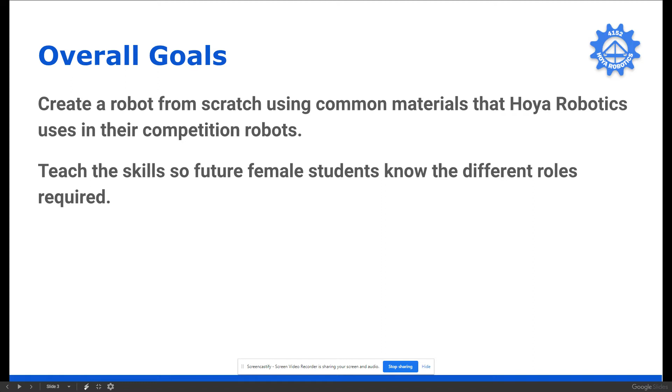The overall goal for these tutorials is to design a MiniBot, and we've got a series of girls from grades 5 to 10 that are involved in this, and we're doing it remotely because of COVID-19. Our goal today is just to learn about the motors and gears and select them for our robot.

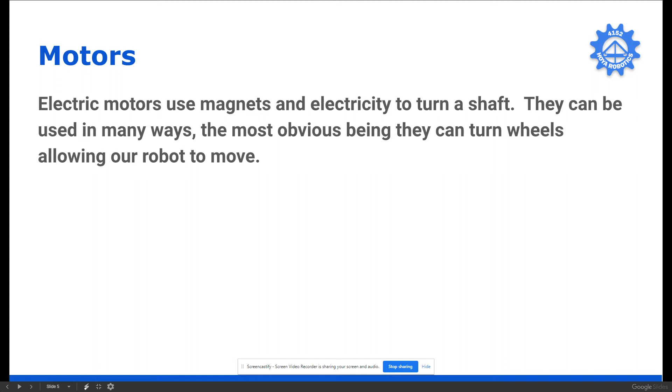So just a little bit of background. Motors that we use on a robot are electric, and if you took apart an electric motor, you would see that there's magnets, and basically an electric current runs through the wires, which magnetizes them. So if you have a positive magnet and you're pushing it against another positive magnet, you're going to get repulsion, where the magnets move apart. That's the basic idea with how the motor works.

There's a couple key terms that are really important. Free speed - we measure this in revolutions per minute. If the motor was just running with whatever amount of voltage you're applying, what speed is that shaft going to be turning at? If you were to count how many turns it made over the course of 1 minute, that's how fast it is. You can use that information, if you know the diameter of a wheel, to determine how fast the wheel would turn and how much distance the motor would cover.

The stall torque - this is how much force. If I've got a shaft turning and I apply a force against it, how much before it stops? Think of biking up a hill - you might reach a point where you simply cannot pedal anymore because the amount of gravitational force is preventing you from getting up that hill. Typically with motors, we measure it in ounce-inches or newton-meters. So if your shaft was turning a pulley that was lifting a weight, you could determine exactly how much weight you could use before the motor would stop.

If a motor stalls, the electrical current is going to go up. This is how much electrical current is going to be going through when that motor stalls, and this is really important, because increased current will increase the level of heat. You can get a point where a motor is trying to push and it simply can't - the current goes up, the wires get really hot, and when things get hot, things start melting, and then you get fire. So if you know the stall current, you know what fuse to put on so that it will pop the breaker or blow the fuse before it damages the motor. That's typically measured in amps.

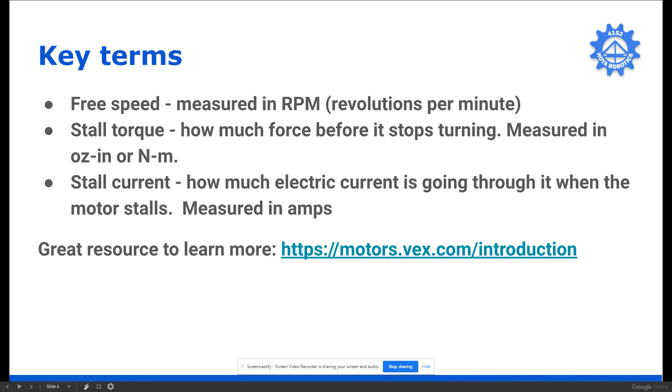The website listed there is a really good resource to learn more in detail about this.

When we go into competition, we are following the rules for the FIRST Robotics Competition. firstinspires.org is the website, and it's really important to spend some time exploring it so that you know how to pull up the manual. This is from the manual, and you can see that it lists the types of motors that we're allowed to use on our robot. This is really important - you basically don't use a motor unless it's listed in the rules.

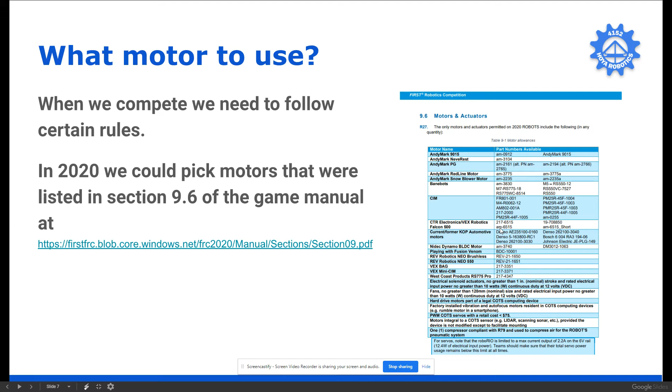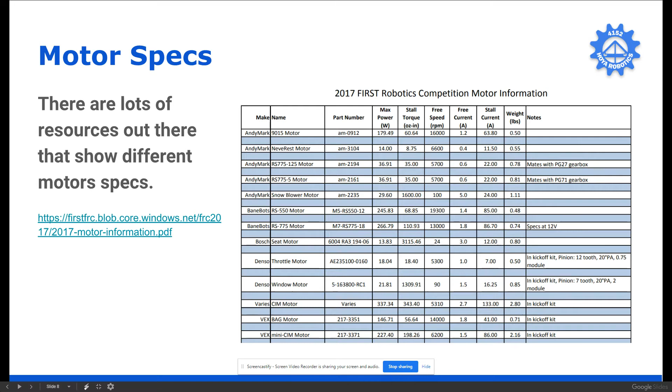In terms of motor specs, on the firstinspires.org website, if you go to the FIRST Robotics section in the programs, you'll see there's a lot of different resources. There's a chart like this which is really handy because it gives you information about the different motors and how much power they can have. Now this is from 2017, so it's missing some of the newer motors. When you're looking at newer motors, typically go to the manufacturer's or the seller's website, because they'll have the detail. Vex Robotics is a good example.

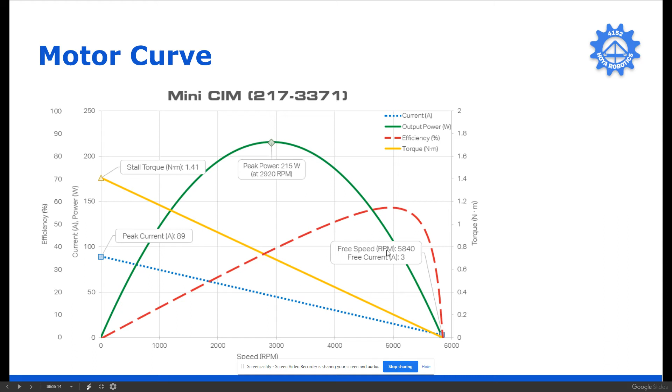Now, the problem is that usually you don't want to typically run your motors without being able to change their speed or their torque. And this is where gears come in.

So you have a 10-tooth gear right here, attached to the motor, and you've got this bigger tooth gear here with 50 teeth. As this small one turns, each tooth is going to engage and turn another one, so this will go all the way around, but what will happen is that will only move this 10 teeth. So this has to go 5 times around before this will go once. So if I've attached this small one to a motor, the motor can go really fast, and the output from this gear will be much slower - it'll be 5 times as slow.

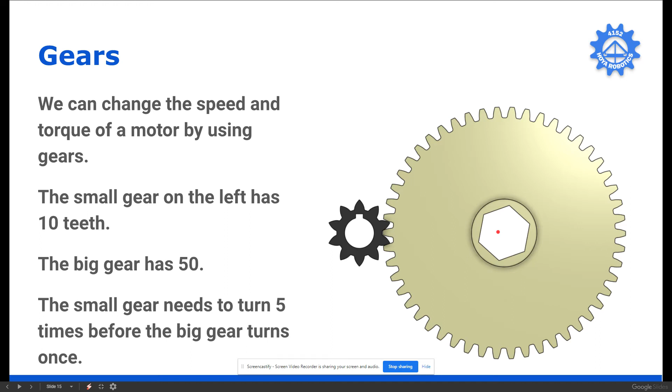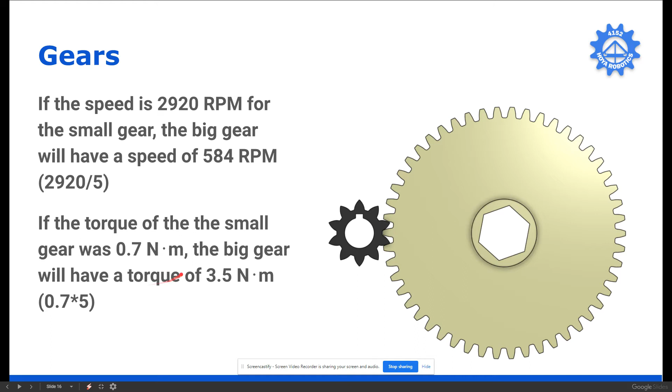So this is a really useful concept because I can change my speed - now my output is maybe 584 revolutions per minute, so it's slower, but it also increases my amount of torque. Now I'm going to get 3.5 newton-meters torque out of this. With my calculations, I'm basically dividing by the gear ratio or multiplying for the torque - it's not quite that simple, but for our explanation, it is.

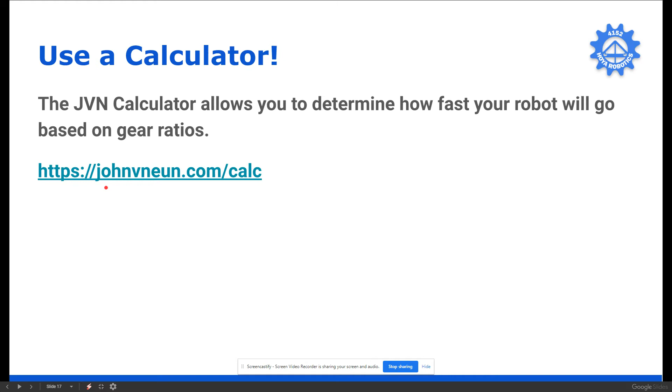Now, the JVN calculator - this is a really useful tool that somebody created, and there's a link you can download it. It's a spreadsheet, and you can upload the spreadsheet to Google Sheets so that you can actually make changes in it. On the spreadsheet there's a whole bunch of different tabs, and this is the tab for the one-speed drivetrain.

Basically what you can do here is you can put in what motor you want - this little drop down, I can pick the different motors that are available. With the red, I typically will look at these - for example, number of gearboxes and drivetrains, so we're going to have 1 on each side, so 2 in total, and we're going to put 1 motor in each gearbox. The total weight of our robot, I'm estimating, is going to be 25 pounds. Our MiniBot is much smaller - typically an FRC robot can be about 150 pounds, they're fairly big.

And then I can also decide what size wheels - I'm just going to aim for 4-inch wheels. Then in here I can start playing around with the gears, so I go to the Vex Robotics website and I look at the different gears and stuff, and I am using a 14-tooth gear on my motor. How I picked these is basically I looked through what gears we currently had, and these are ones that I have available, so I'm just going to plug them in. So if I'm going from 14 teeth and driving 50 teeth, then 16 teeth to 48, and then a series of sprockets 12 to 15, this will give me a gear ratio of 13.39 to 1.

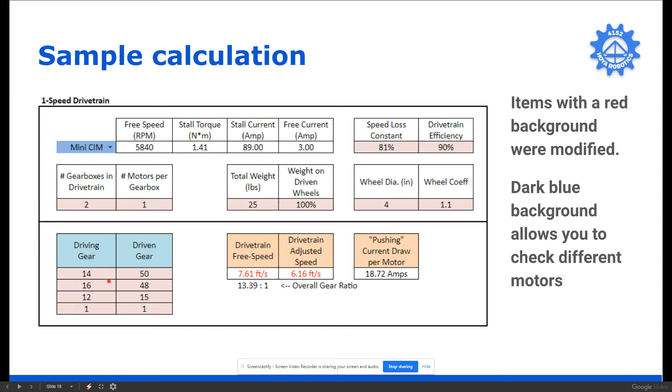With our drivetrain motors, usually we're on a 40 amp circuit, so we want to keep this number under 40, and under 20 is fabulous. It's nice and low. I've got a little bit of wiggle room, but you want to play with the numbers to find the ratios that are going to work, and then you can figure out what types of gears you need to buy to make your robot work.

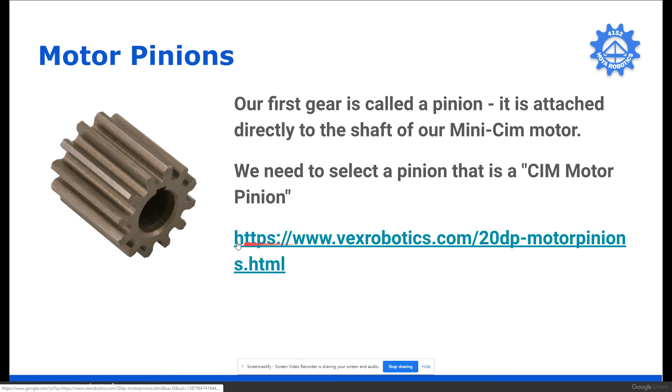So, motor pinions. The first gear is a motor pinion, and this is an example of one of them, and it fits directly on the shaft of a Mini-CIM motor. A Mini-CIM motor has a round shaft that's got a little slot, and you can see the slot here. Basically, this slot allows you to put a key stock on it, and the key stock is just a rectangular piece of metal, and that will go in here and slide into the shaft of the motor, so that it kind of locks it in place, so that as the motor shaft turns, this will turn as well. Different types of motors are going to use different types of pinions, so it's important to make sure you're getting the right pinion for the right type of motor.

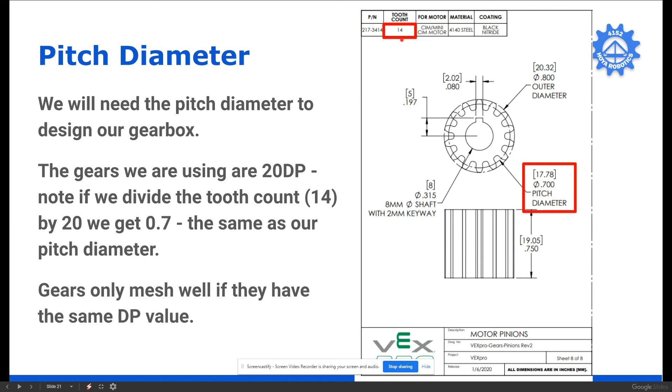So gear 1 is the 14-tooth gear, and on the Vex Robotics website, that's the particular one we're going to be using. Down at the bottom of the Mini-CIM page, you can see there's a whole bunch of different options, and the drawings are one of them. This is the drawing for the 14-tooth gear. You can see the tooth count, and you can see the pitch diameter.

In order to plan our gearbox, we need to know the pitch diameter, and there's a nice little trick here. We have a 14-tooth gear, and our gears are 20 DP gears, that's the type of gear they are. DP stands for diametrical pitch, but basically if we take 14 and divide it by 20, we get 0.7, and that is the pitch diameter, the diameter of this line. When we're designing our gearbox, if this line is touching another circle with the same thing, then we know the teeth are going to engage. So we've got to make sure our gears have the same diametrical pitch, and then we can line up these circles so that we know the teeth are going to line up perfectly.

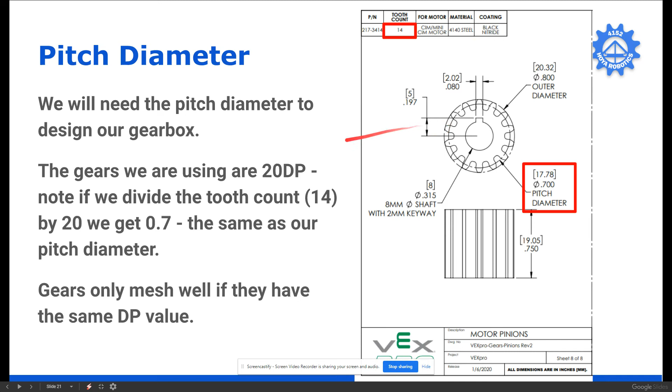Our 14-tooth gear is, if we were to get this overall gear ratio, then we would need a second gear of 187, which is going to be 9 inches in diameter - not going to work very well.

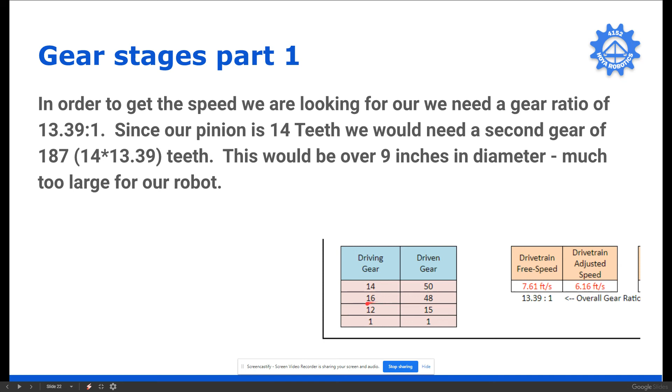So this is how we do stages. Our 14-tooth gear is going to drive a 50-tooth gear. Then we're going to put a gear on top of the 50-tooth gear that's going to drive a 48-tooth gear. So we're going to have multiple stages, which will allow us to get the gear ratio we want without having a ridiculously large gear that simply won't fit.

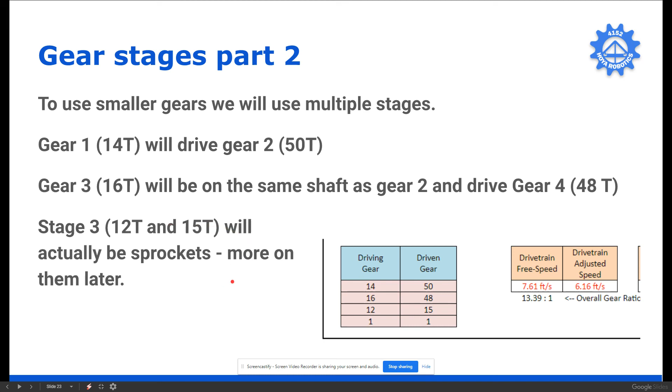Gear 1 drives gear 2, gear 3 is on the same shaft as gear 2, and it drives gear 4. Then we're going to use sprockets, and we'll cover those in a later tutorial. Gears 2 and 3 are going to be on a 3/8 inch hex shaft. The hex shaft is really nice because you can just slide the gear onto it, and when the hex shaft turns, because it's a hexagon shape, the gear will automatically turn. So it's very easy to mount and assemble them.

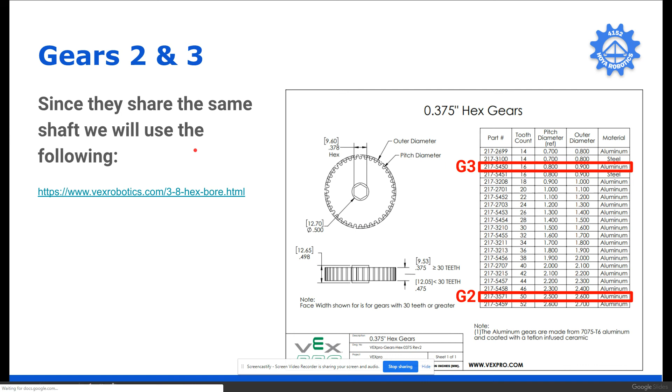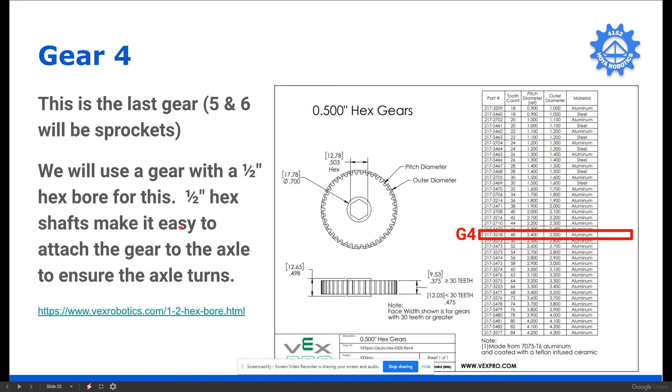Gear 4 is a 48 tooth, and again at 20 dp, it's going to be this. Now this is going to be our output, and we're going to use a 1/2 inch hex bore for this. A 1/2 inch hex shaft is how our wheels are designed, so it's going to be easier to use the same thing with the gear. So that's our goal.

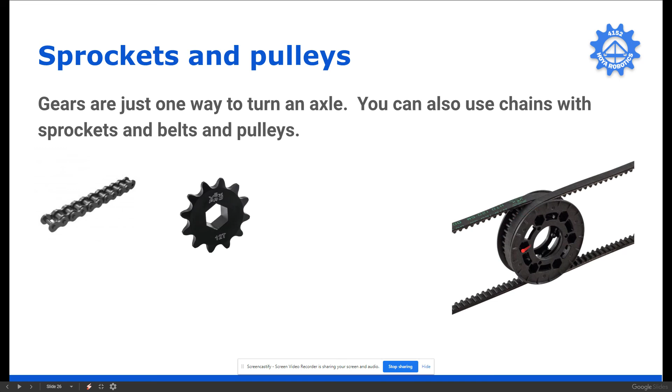Gears are one way to transfer force from a motor. There are other ways too - chain and sprockets are one, and if you think of a bicycle, most bikes use a chain with a sprocket type system. There's also belts, and for example on our lawnmower, I've turned it over and had a look, and there were belts that took the power from the engine and transferred it to the blades. So chains and sprockets, belts and pulleys - there's different ways to attach things.

With the gears option, there are some ways. Vex Robotics sells something called a versaplanetary gearbox, and if you think about a drill, it has a very similar type of gearbox attached to it. That allows you to attach a gear system in a very small space, so that can be a very handy thing. Being able to buy that type of gearbox makes it really handy.

Gears do need to be greased, and they can be pretty noisy. The other thing is, when you're manufacturing, you need to be incredibly precise to line gears up. You don't want the teeth to be too close, which is going to cause them to bind up, or too far away where they won't fully engage, and the wear and tear on them can prevent them from actually touching.

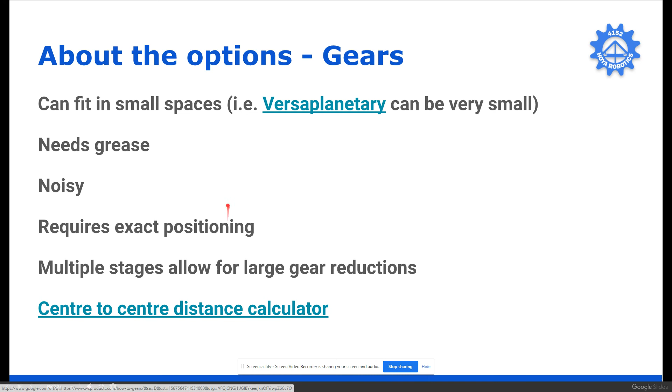Multiple stages allow you to get really good gear reductions, and there is a center-to-center distance calculator that you can use on the web to do that. All of these links are in the slideshow and can be clicked on to go right to them.

Chain and sprocket - they're pretty noisy. Now the bonus with chain and sprocket is that I can change how long my chain is. I can break a link or add more links to it, so I can make it longer or shorter. That can be really handy as I'm prototyping and trying to design something, and I'm not going to worry too much about how far apart things are because I can just modify my chain.

Now chain can stretch over time - I'm using the word stretch, though it's not technically what's happening, but basically as chain gets used over time, friction wears away some of the pieces, so they pull apart. If you're only pulling apart a fraction of a millimeter, it doesn't seem like much, but when you have maybe 100 links, that can add up to quite a distance, and that can change your tension on your chain. So that's something you have to keep in mind.

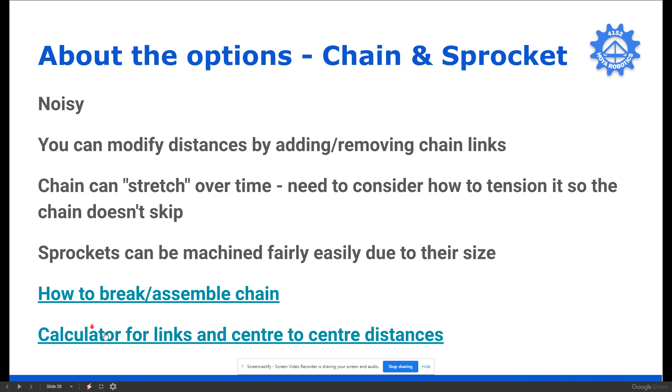Now with sprockets, you can manufacture them fairly easily, so there are some bonuses. If you wanted to make a turret, for example, you could use a chain and sprocket, because then you can laser cut the plastic to make a sprocket. There are some links to calculate how many links for different distances and how to break and assemble chain.

Belts and pulleys - belts are pretty quiet, which is nice, and they don't tend to stretch. We really like using belts, and we've got some really tiny belts and pulleys that can allow us to transfer the power from a motor into a really tight space, which is nice.

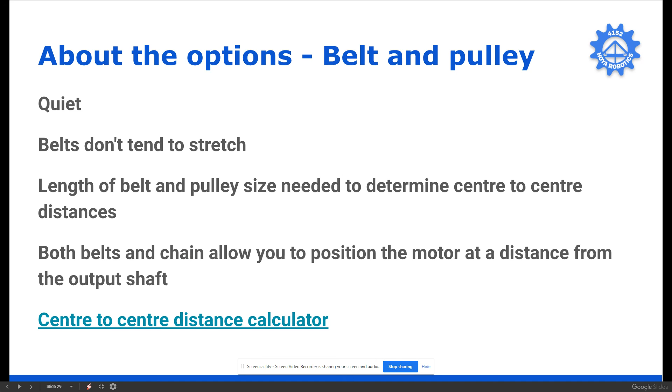You do need to be incredibly precise with your center-to-center distances, and there is a calculator online you can go to - West Coast Products has an excellent calculator. This allows you to have your motor farther away. With the gearbox, the motor and the gears are very close together, but with belts and chain, you can set different distances away.

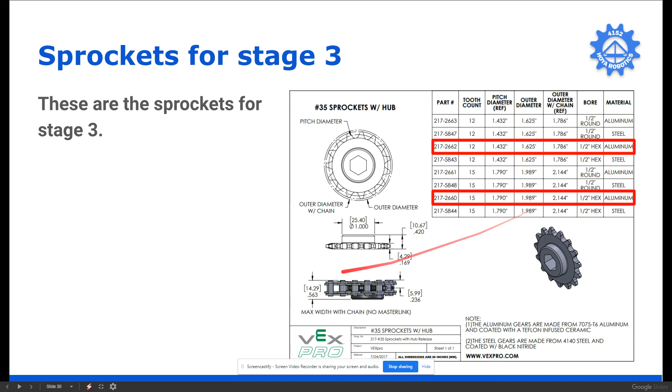Our sprockets we buy from Vex Robotics as well. The 12-tooth sprocket is there, and they're a 1/2 inch hex, and then our 15-tooth is there. So that's our sprockets.

Just a quick summary for our MiniBot. We're going to have 20 DP gears. Stage 1 is a 14-tooth CIM mount pinion, and it turns a 50-tooth 3/8-inch hex bore gear. Stage 2 is on the 3/8, and gear 3 is 16-tooth, and it's turning a 48-tooth gear that is on a 1/2-inch hex.

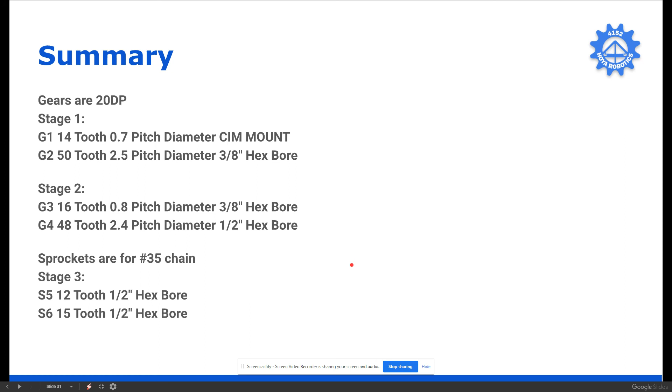Then attached to that same hex is going to be our sprocket number 5, which is going to be 12-tooth, and it's going to be turning a 1/2-inch hex that is attached to the wheel, which is a 15-tooth. Hope you've enjoyed this and learned a few things, and have a great day.